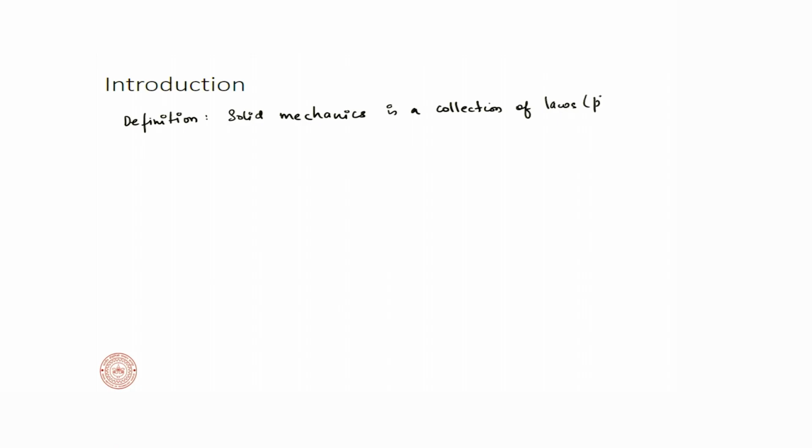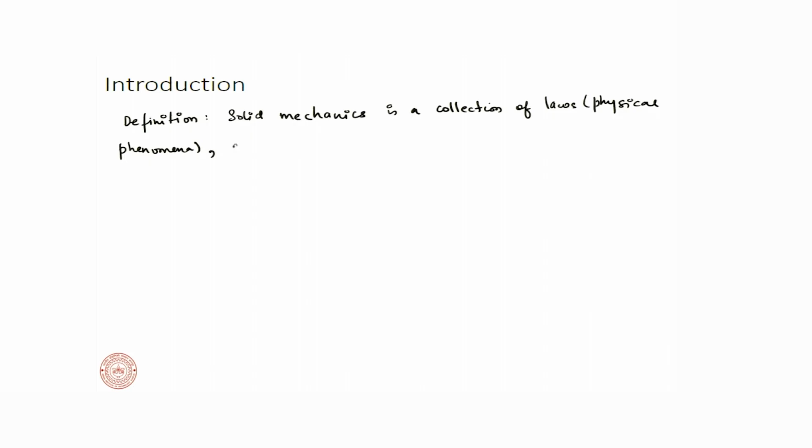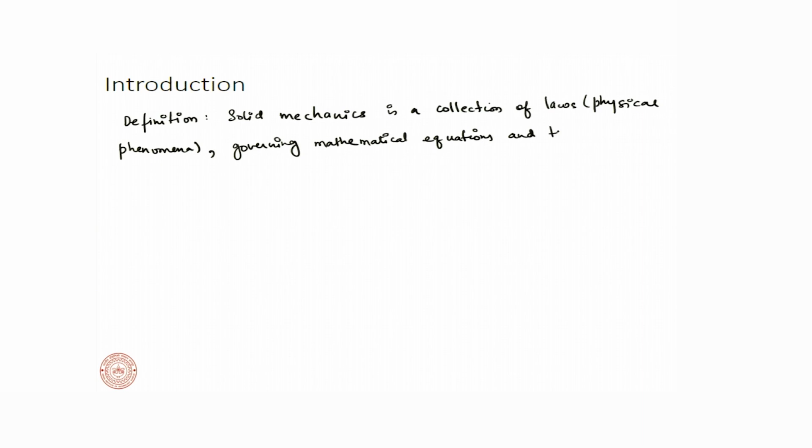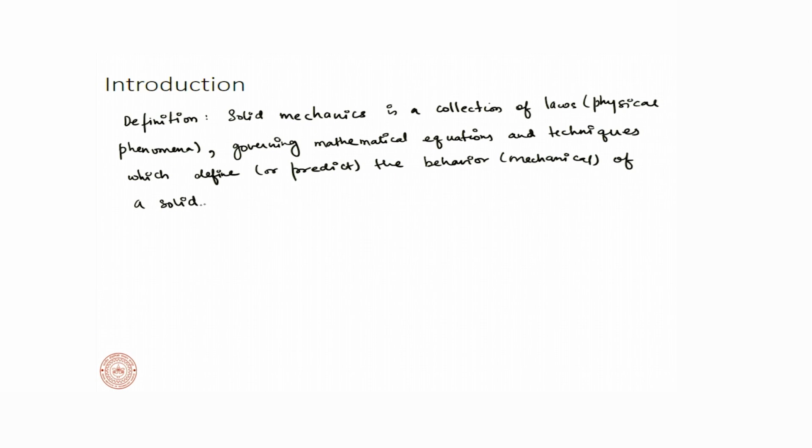So by definition, we can define solid mechanics as a collection of laws, physical phenomena, and governing equations and techniques which would define or predict the mechanical behavior of a solid body or material under the influence of external stimulus, which is typically mechanical loading, thermal loading, etc.

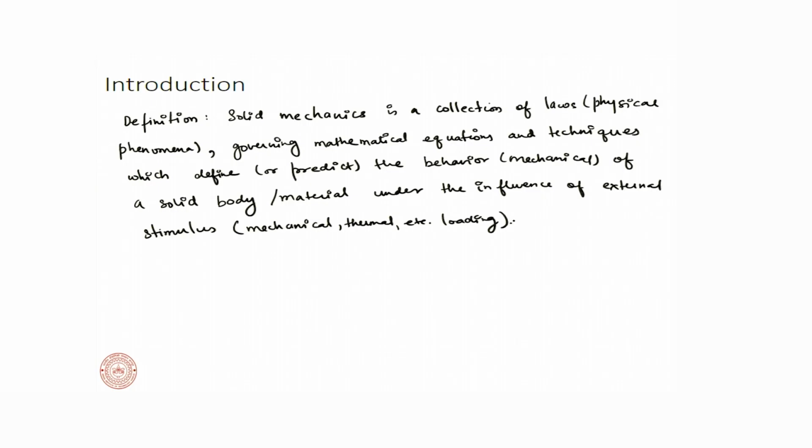So this field studies the deformation and all the physical phenomena and governing equations of a body that is influenced by an external stimulus, which is either a mechanical load, meaning forces, or a thermal load, such as a change in temperature or temperature gradient. It can also be some form of concentration variation of one species in another within a solid medium, which causes strain in the body. All of these fall under this category of solid mechanics.

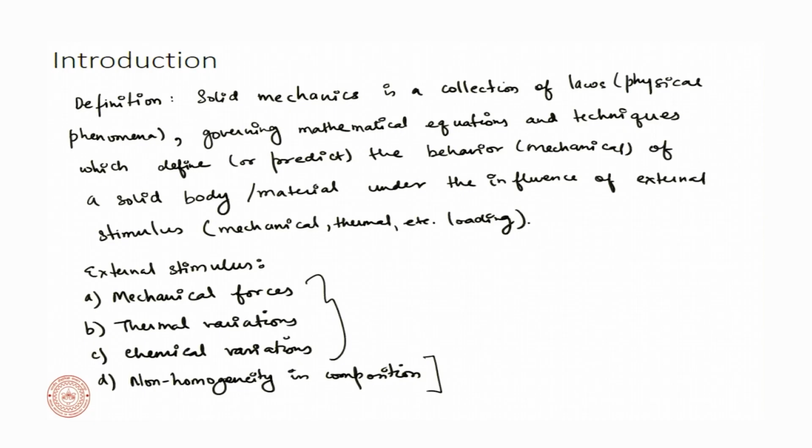External stimulus can be of different forms, as we talked about. They can be mechanical forces, thermal variations, or chemical variations, where the chemistry of the system is changing. They can also occur due to non-homogeneity in composition, though this last one is not so common. The first three, however, can be seen very often, and these external stimuli are required to cause the stress development or generation in a body.

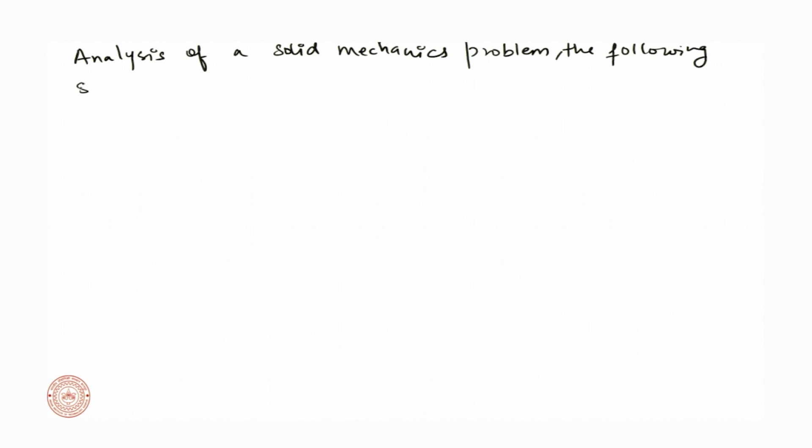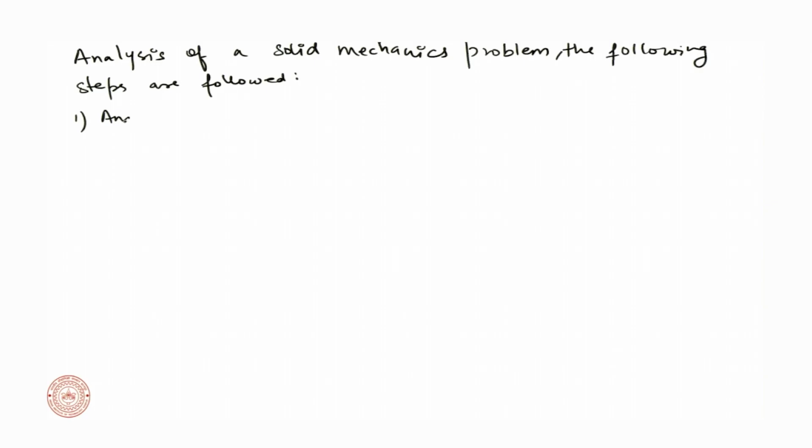So whenever we are doing an analysis of a solid mechanics problem, we follow certain steps. Step 1 is the analysis of strain or deformation.

So the first thing that we look at in a body is something we can physically measure, which is the strain in a body. For example, you have this pen: if I stretch this pen, it is going to elongate. If I press or compress this pen, it is going to shrink. This is something we can physically measure. We have tools to measure the strain or deformation—rather, the deformation is something we can measure and strain we can get out. For example, I press this tip at the front and it is getting in and then it is coming out.

There is a spring inside which is being compressed and then released - these are mechanical stimulus. What we are measuring is the deformation. That is the first thing we can do. We have scales and other devices which we can measure distance with, and the length contraction or expansion, the shape variation, the rotation of a body in a coordinate system is something we can very easily measure.

You can imagine that there is a membrane like a drum and you are beating the drum with a stick. The drum is vibrating under that influence, and that vibration of the drum is the deformation. So you can measure that deformation and that will give you the strain in the body.

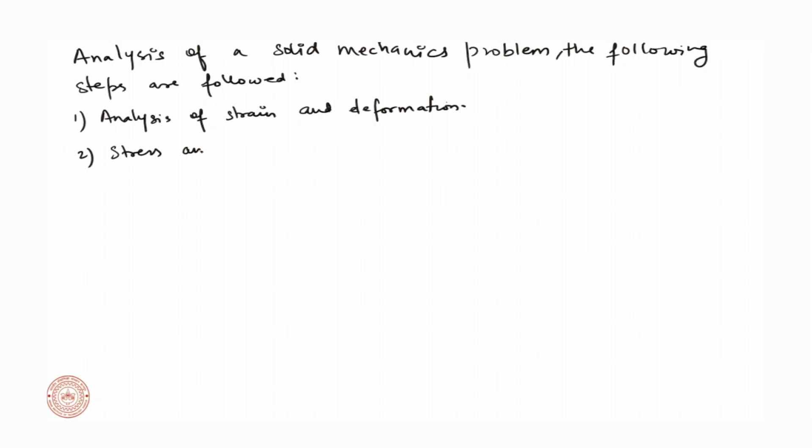That is our first objective, or first step, towards solving any solid mechanics problem. The second part is your stress analysis. This gives us the relation between deformation and strain. The stress analysis relates the forces to the stress.

A body is subjected to physical force - I can press this down, I can bend this, I can push this pen in, and all of these stimulus, external forces, are being applied. These are surface forces. Likewise, you can have volumetric forces, like for example if I drop this pen, then the force acting on it is due to gravity. Likewise, you can put it into a fluid and it is compressed from all sides - that is hydrostatic loading, so that is pressure.

So there are forces acting from all directions on this body, and those forces result in stress development, or some internal resistance provided by the body against that external stimulus. These internal resistances are called the stress. So relating forces to stress will be our next analysis - understanding what are the forces in the body, what kind of forces, what framework we are looking at, will give us the forces.

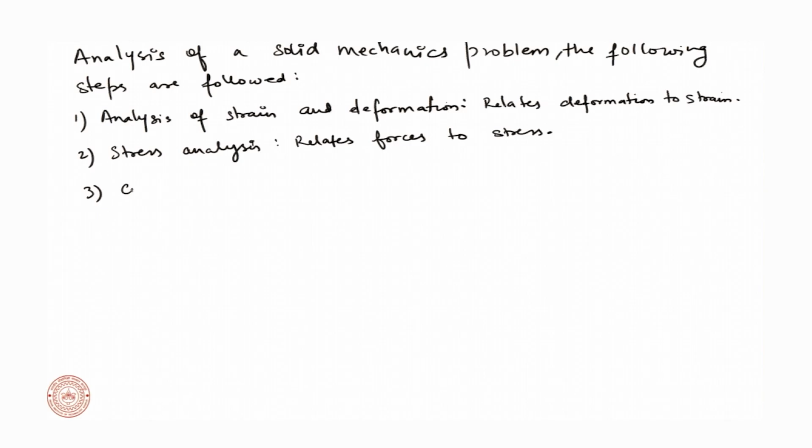Then the third step is an extension to the force analysis, and that is called the conservation law. In this case we are doing force equilibrium, or conservation of linear momentum. F vector, that is a summation of all forces, equals the mass of the body times acceleration. You have a body, forces act on it from all directions, it is falling down, being compressed, rotated, bent - all of these forces together act on the body, and the summation of all the forces equals the mass of the body times acceleration of the body. That is our force conservation, or conservation law.

So we get one governing equation from the stress analysis. The fourth part will be our constitutive relations - these are mechanical, rather material, correlations that relate the strain generated due to deformation to the stress state of the body. An example of it will be our Hooke's law: sigma equals E epsilon in the 1D format. It is actually a tensor, we have to write E in terms of C-I-J-K-L, we'll talk about it later. So Hooke's law relates our strain to our stress using a material property - in this case, the material property is the Young's modulus, or the elastic constant.

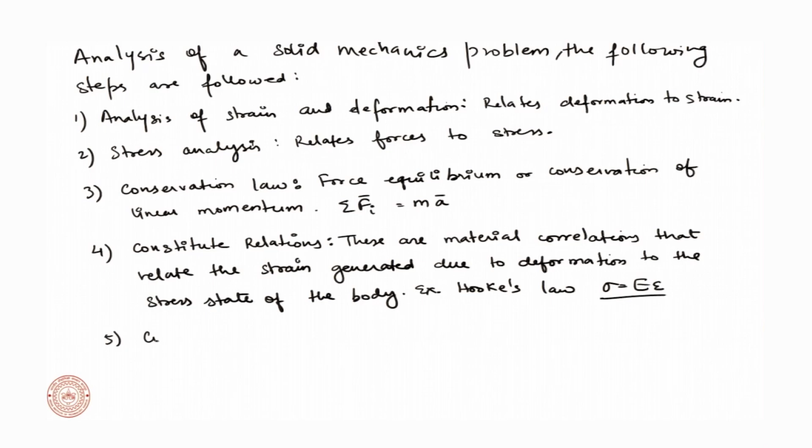So now what we are doing: we have defined strain from deformation. Your displacement, your deformation - that is a position you can measure - gave you the strain. Your forces gave you the stress on the body, or an understanding of what the stress is. You have an equation which relates the acceleration of the body to the net stresses or net forces, and then you have a way to relate that force or stress to the deformation. So now the last step is to bring everything together - to substitute the stress by the strain using this constitutive relation, and substitute the strain by deformation. What we will get at the end is a net conservation equation - a governing equation, rather.

In which we substitute the strain or deformation into the force conservation.

That is our conservation equation. So we substitute our strain, and in terms of strain we are substituting our deformation into our force conservation equation, and we have one equation which is in terms of deformation. Why are we doing so many steps to come to this equation? This equation is called the Navier's equation.

Why are we going all the steps to come up to this equation based upon deformation? As I said earlier, deformation is something you can measure. Stresses in a body you cannot measure, there is no way to measure stress. Stress by definition is the internal resistance to an external stimulus. So if there is a deformation in the body and it is going away from the natural state, the body will develop internal resistance, or a solid will develop an internal resistance against it. In the case of a fluid, it will flow and continuously deform, but in the case of a solid, it is not going to continuously deform.

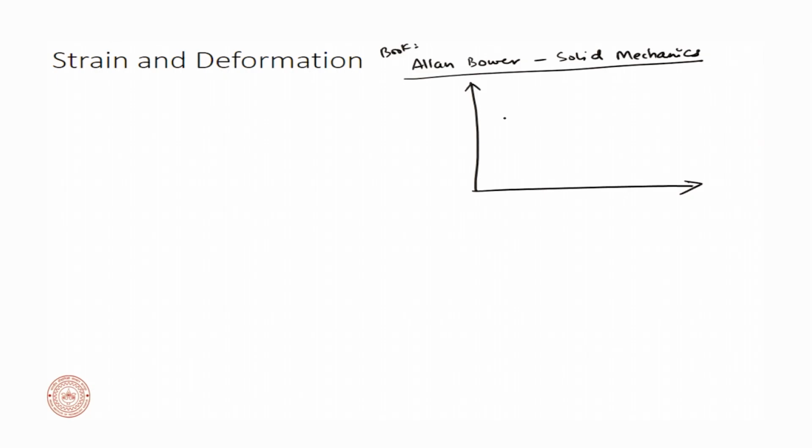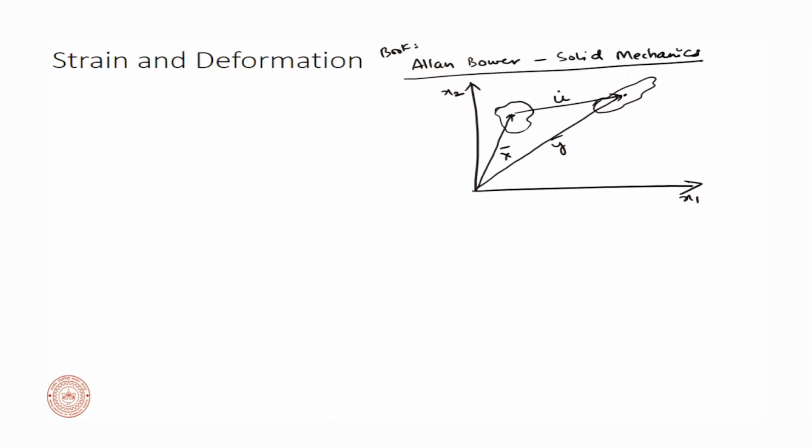Okay, so let us take a body which is initially over here. If we draw it from the coordinate center, this is say x1 and x2. This is our x vector, and it has deformed and it has moved and rotated to this new point. Let us define this by the y vector, and then the vector which is joining, or this displacement that happened, is given by the u vector, which is a function of x and t. So we have this body A which has moved from A to A star.

It has gotten a new configuration, a new body configuration. It is now at A star. Our initial vector was x vector at a given point, and the same point if we trace to the new body, the vector is y vector. How we relate y vector to x vector is that y vector equals x vector plus u vector, which is a function of x and t. So our u vector is our displacement.

U can change with position, U can change with time. So, the velocity...

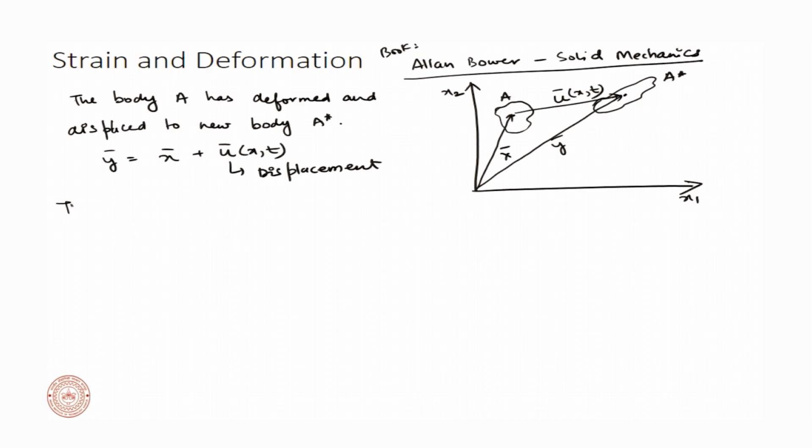v vector will be equal to the time derivative of this, that is dy vector by dt, which equals du vector, since it is a partial. x vector is your initial, it is not going to change, y is something that will change with time, that is del u vector by del t, which is a function of x and t.

If you remember your initial first few lectures on index notation, we have looked at coordinate systems and index notation. We have written v of I equals del u of I by del t, where I is an index, with I belonging to the 3 directions 1, 2 and 3.

If that is comfortable, then we will define our first type of strain, well, not exactly a strain, but a kind of strain, called the displacement gradient.

As the name suggests, if u vector is our displacement, then our displacement gradient is given by u vector dyadic with the gradient, and this equals del u I by del x j along E I and E j. This is a tensor.

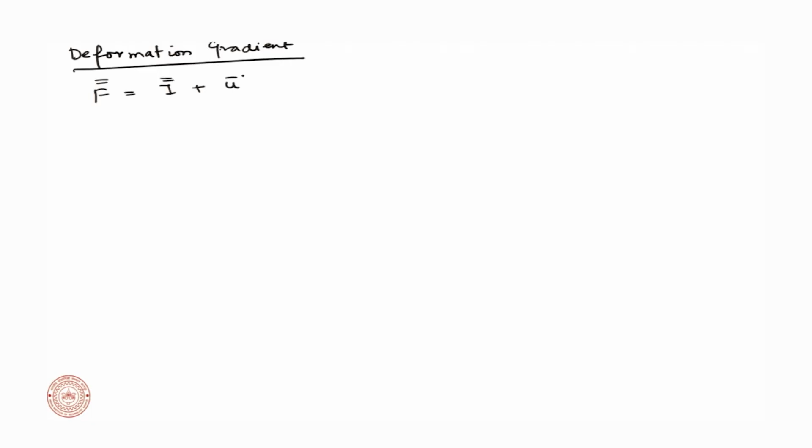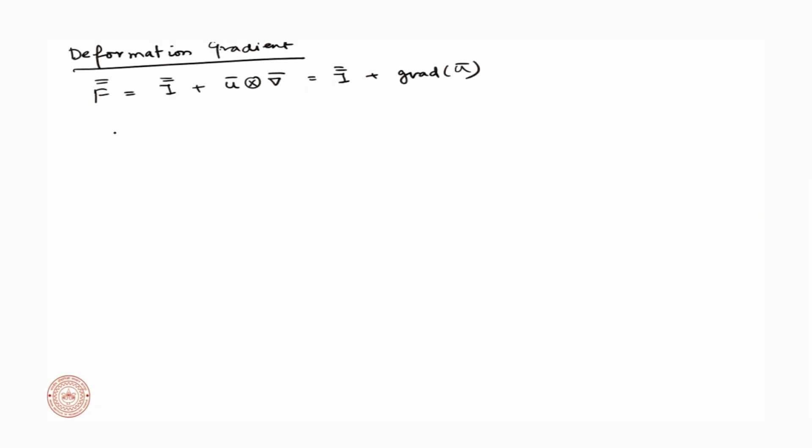The deformation gradient is given by f tensor, which equals I plus our displacement gradient, which equals I plus grad of u vector. Let us write it in terms of index notation: f I j equals delta I j plus del u I by del x j.

So what we did in terms of our matrix is just we added 1 to the diagonal elements. Let us write it in terms of the matrix. It will be 1 plus u1,1, u1,2, u1,3. You remember the comma index as well, right, any type of gradient or derivative is given by a comma and then the next notation. Then u2,1, u3,1, so this is our deformation gradient.

So now we have a term that is new and that we have defined, this f we will come back to again and again. Let us see if we can relate f to y somehow.

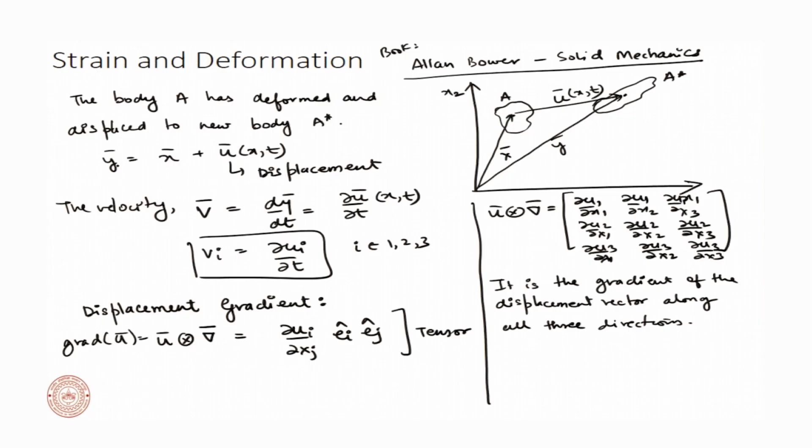If we have this y vector equals x vector plus u vector, if we take the derivative of this y vector with respect to x vector, then we can get our deformation gradient. So let us write that: y vector equals x vector plus u vector.

So f of I j equals d y I by d x j, which equals d by d x j of x I plus u I. So d x I by d x j plus del u I by del x j, because it depends on time as well, which equals delta I j. So that is our definition.

We have our deformation gradient is the gradient of our final position vector with respect to the initial position, so it is a gradient of the final position vector. We can relate d y I equals f I j d x j. This is a tensor, what it relates is our initial position vector to our final position vector.

We can also invert this. So we can say dx_I equals f inverse_Ij dy_j, or dx_I over dy_j equals f inverse of Ij, that is the inverse of our deformation gradient. So calculus allows inversion. This is possible.

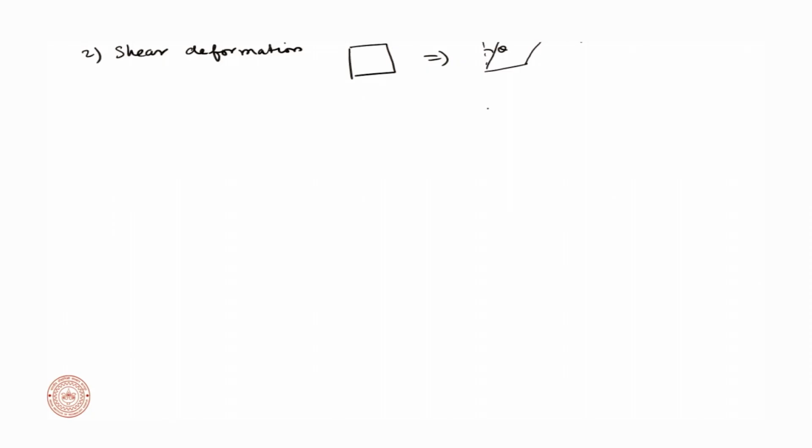The next one will be shear, again with no volume change. So shear deformation can have a body like this, and it has deformed by a certain angle theta under the influence of some force. So then our y1 will be equals to x1 plus x2 tan theta, y2 will be equals to x2, and y3 will be equals to x3. So this is our net shear deformation.

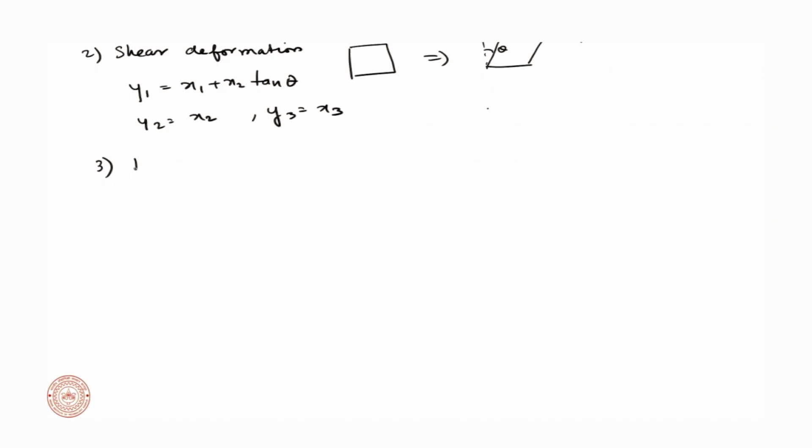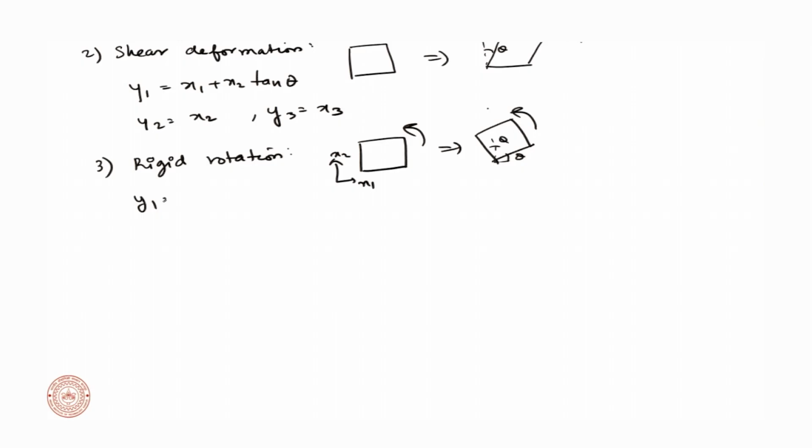So then the third one could be rigid rotation. Again there is no volume change in this case. Say that our initial body, this is our coordinate system x1 x2, and this goes to rigid rotation, so it has rotated counterclockwise. So we can say the rotation took place by an angle theta, and then y1 equals to x1 cos theta minus x2 sin theta, y2 equals to x1 cos theta plus x2 sin theta, y3 equals to x3.

We can also have 3-dimensional rotation. We are just looking at 2D bodies, but we can also have 3D rotation, in which we have a rotation matrix, which we multiply with our initial position vector to get the final position vector. In that case, there is no deformation, it is the same, just rotated.

And the last one we can have is displacement without deformation. Again, this is with rigid rotation, meaning there is no deformation. So in this case, say this is our body and it is moved along x. Same body, so it has moved only along x.

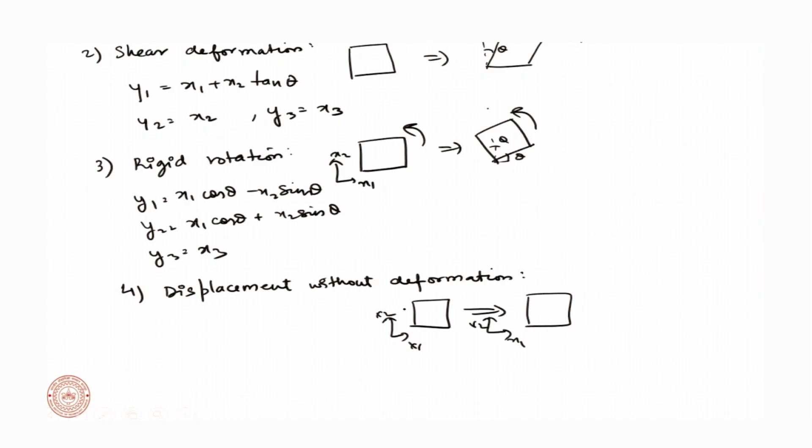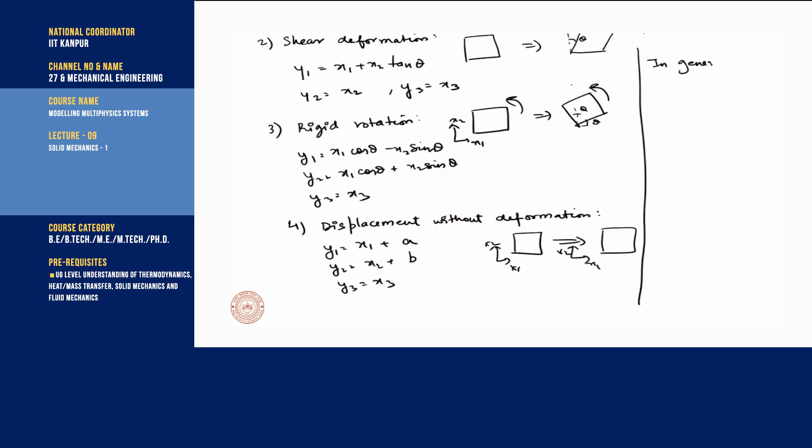So y1 equals to x1 plus a, y2 if it is also moved along y, it is x2 plus b, y3 equals to x3. So our general deformation, in general, is a superposition of longitudinal plus shear deformation and rigid rotation and lateral displacement.

So we can have the body either stretching without changing, without having any shear. We can stretch and pull, that is one kind of deformation. We can have shear, that is shape change, or rotation, that is shape change, again from the same position. So in both cases the position is the same, it is not moved, it is just stretched. We can have the body rotate about one axis. And we can have displacement without deformation, where the body itself without any kind of deformation is moving from one place to another place. All of these together give us a net deformation of a body, and that is what we are looking for.

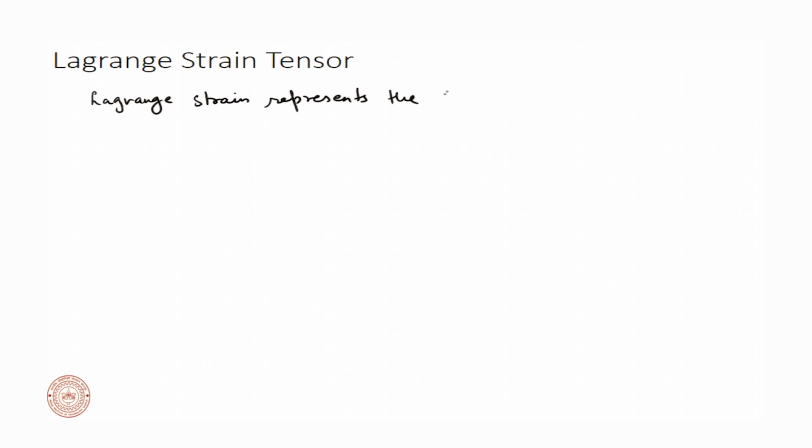So the first kind of strain that we will talk about is our Lagrange strain and the Lagrange strain tensor. Lagrange strain represents the deformation of a body with respect to the initial frame of reference.

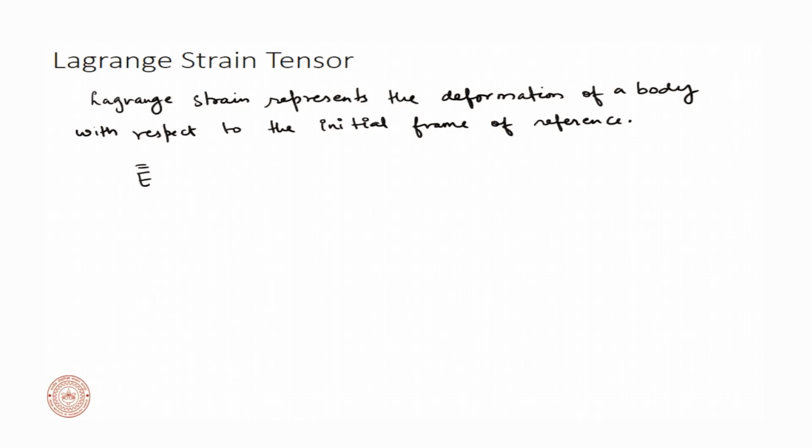With respect to the initial frame of reference, when we are looking at deformation, and these can be large deformations as well, the strain we get out is the Lagrange strain. By formula, the Lagrange strain capital E is equal to 1/2 of F transpose dot with F, minus I.

So E I j in index notation is 1/2 F k I F k j minus delta I j. Remember that transpose inverts the index, so it would have been I k and k j. If it is F transpose, then I k becomes k I, and the second one is just F, so it is F k j.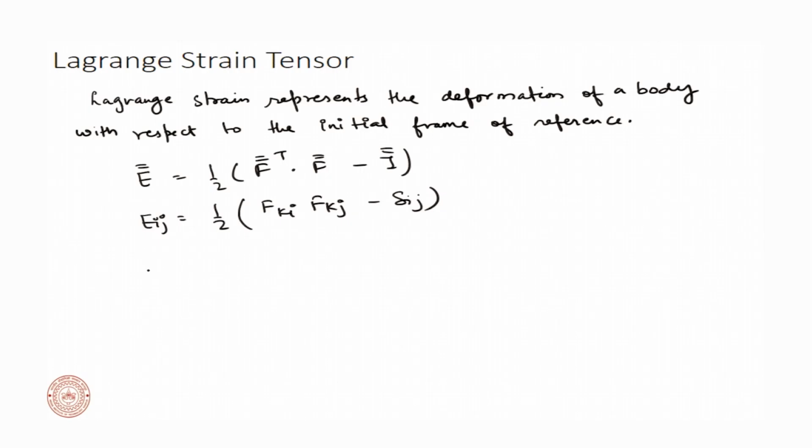Let's substitute our F values. F I j we know is equal to del I j plus del u I by del x j. We will substitute this in E I j. We get E I j equals 1/2 of del k I plus del u k by del x I, multiplied with del k j plus del u k by del x j, minus del I j.

Expand this out. We will have del k I del k j, plus del k I del u k by del x j, plus del k j del u k by del x I, plus del u k by del x I del u k by del x j, minus del I j. This is a big expression coming up.

Let's try to shorten this expression. By the property of the Kronecker delta, del k I into del k j will be equal to del I j, since k is the repeating index, in the case of Kronecker delta, it will combine together and become del I j.

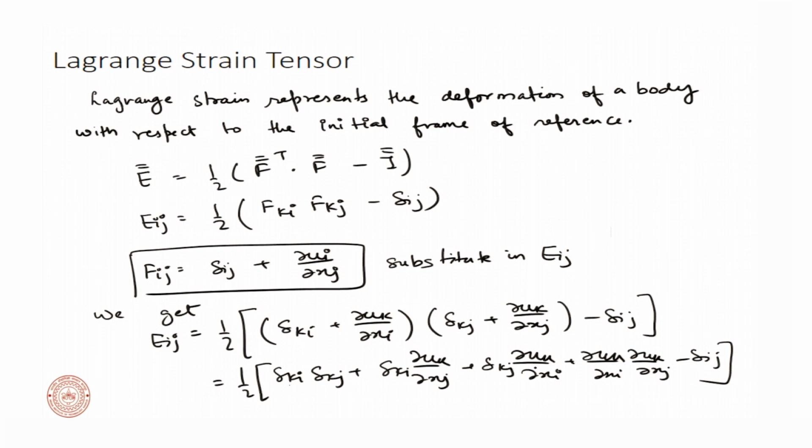Solving this, E I j equals 1/2 of: first term del I j, plus del u I by del x j, plus del u j by del x I, plus del u k by del x I del u k by del x j, minus del I j. Cancel these out, and therefore E I j equals 1/2 of del u I by del x j plus del u j by del x I, plus this nonlinear term del u k by del x I del u k by del x j.

This becomes our Lagrangian strain tensor. It is a combination of our displacement gradients, two displacement gradients, and a product of the two displacement gradients. Let us see what it represents.

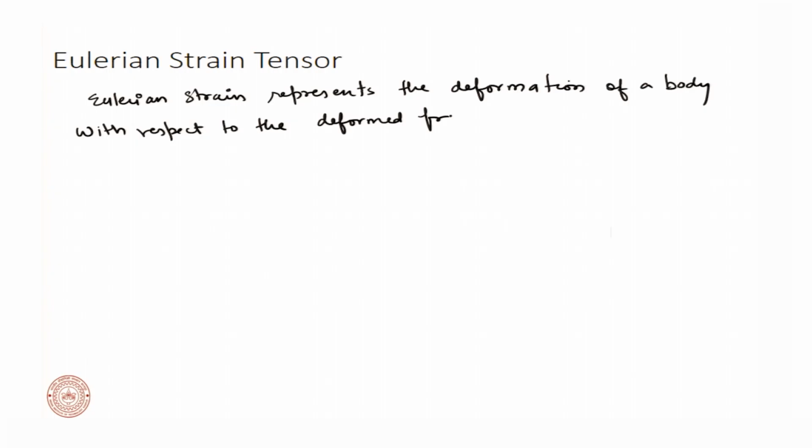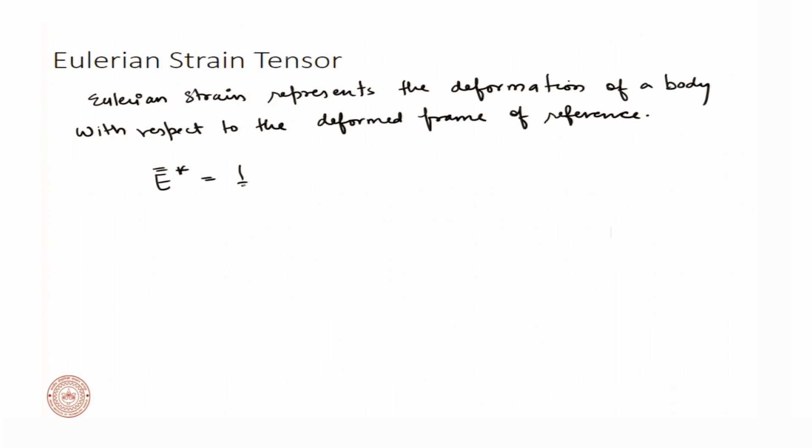This is given by E star, which equals 1 by 2, I minus F inverse transpose F inverse. So Eij, E star ij, therefore will equal 1 by 2, del ij minus F inverse of ki, F inverse of kj, in terms of the value of that strain along some n vector.

Now we have replaced m vector with n vector, because m vector is along the initial frame of reference and n vector is along the deformed frame of reference. This equals L square minus L naught square by 2 L square, which equals n vector dot with E star tensor dot with n vector.

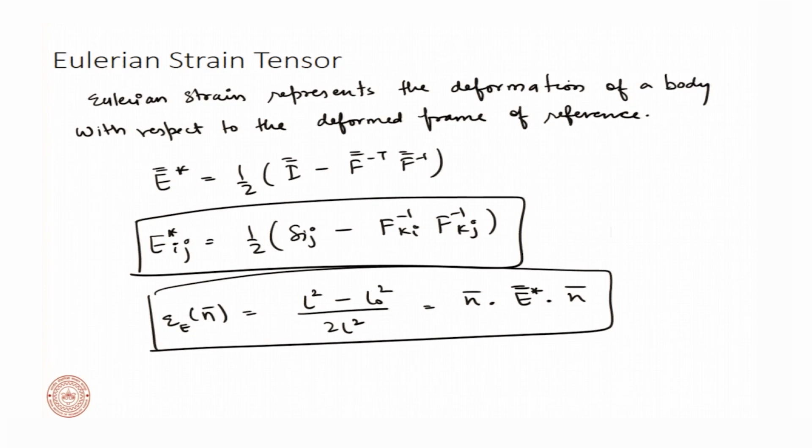So, this is our Eulerian strain tensor and it is with reference to the deformed state rather than the undeformed or the initial state of reference.

Now, in most applications, we are not going to use our Lagrange strain or Eulerian strain, especially unless we are doing something related to large strain conditions. We do not typically use Lagrangian or Eulerian strain—it becomes very complicated to solve those problems. Many solid mechanicians use it in research. However, in practice and in most engineering problems, we do not encounter very large deformations. In case of steel or ceramics type materials, deformations are very small compared to the original length of the body.

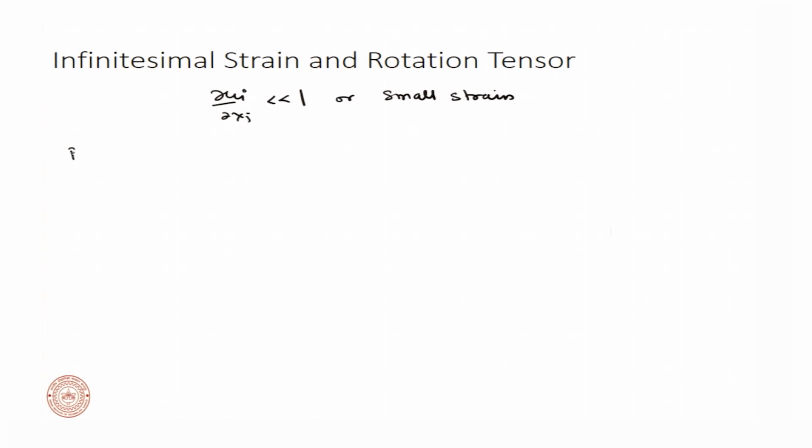So, if del ui by del xj is much less than 1, we have a condition of small strain. Then we redefine our perspective and rewrite our Lagrange strain tensor in terms of the infinitesimal strain tensor. This infinitesimal strain tensor, also given by small epsilon, is 1/2 of your displacement gradient plus your displacement gradient transposed.

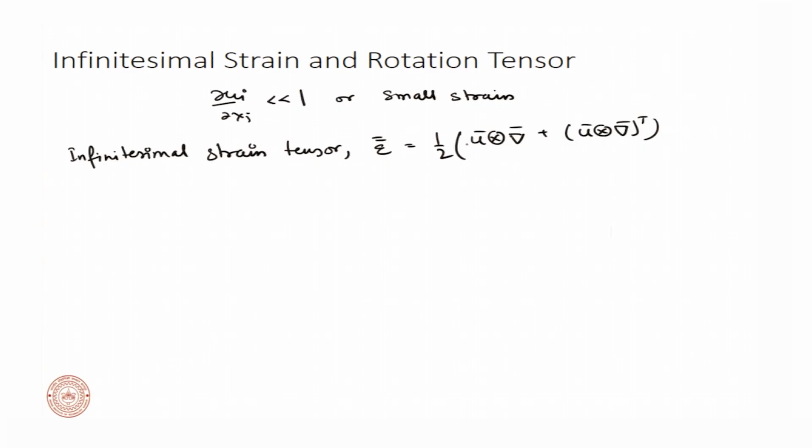That is u dyadic with the gradient, or the gradient of u, plus the transpose of the gradient of u. Let us write it in terms of gradients: gradient of u vector plus gradient of u vector transposed—that is our infinitesimal strain, epsilon.

In terms of index notation, we have epsilon Ij equals 1 by 2 of del ui by del xj plus del uj by del xi.

We can write this in terms of a matrix: u11, 1/2 of u12 plus u21, 1/2 of u13 plus u31; u22, 1/2 of u23 plus u32; u33. I am just writing the top diagonal because the bottom diagonal is the same as the top diagonal, so this is a symmetric matrix.

Now, this epsilon Ij—what we are doing is a linear variant. Let us write it down: this is a linear variant of our E Ij.

If we look at E Ij, it was 1/2 of del uI by del xj plus del uj by del xI, then we had this non-linear second order term del uk by del xI, del uk by del xj. Now, we are considering that del uI by del xj is very small, so the product of two of these terms will become even smaller, like it goes by the square. We can ignore this term under this limit, and then E Ij will go towards epsilon Ij, which equals 1/2 of del uI by del xj plus del uj by del xI.

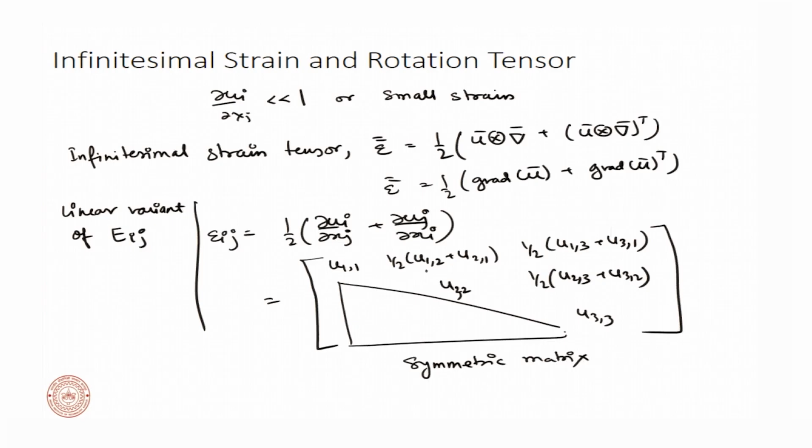Then the gamma ij will equal 2 times epsilon ij. If you look at the epsilon ij tensor, it was 1/2 of del ui by del xj plus del uj by del xi. The net shear strain will be 2 times this, which equals del ui by del xj plus del uj by del xi, where i is not equal to j. So, we multiply it by 2.

In the case of strain tensor, this is fundamentally the nature of the tensor. You cannot multiply that 2 within the strain tensor. However, we do need the 2 when we are finding out stresses. If you are trying to get the shear stress using the shear modulus, that shear modulus needs to incorporate that 2 multiplier, so that this half factor or this 2 factor can be incorporated. Otherwise, you will get half of the shear stress than what it should be.

We will talk about it when we do constitutive relations and constitutive models, but just keep in mind that the actual shear strain is equal to 2 times the off diagonal of the strain matrix. Okay, so that is with understanding.

Then we have our next, so this is our infinitesimal strain tensor. Then we have our infinitesimal rotation, that is given by omega ij, which is equals to 1/2 of del ui by del xj minus del uj by del xi. That is 1/2 of the gradient of u vector minus the transpose of the gradient of u vector. It was plus, this will be minus.